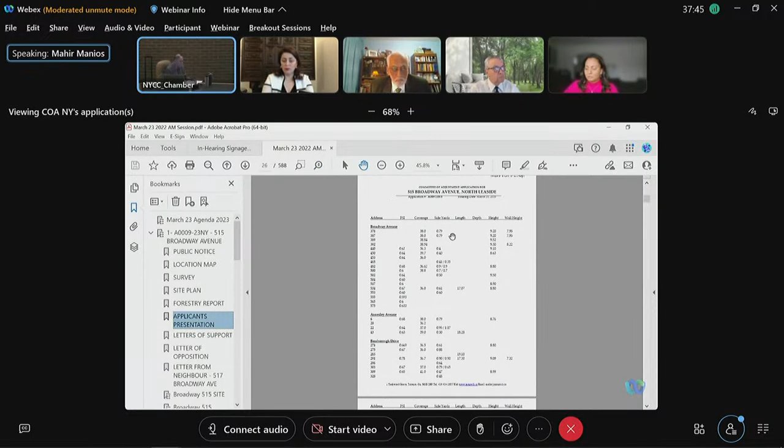Sure, Mr. Chair. If staff could be kind enough to put up the presentation material that we submitted, and scroll to the streetscape, I think it's the 5th page. That's the one, yes, that elevation, not the picture, the one above it please. The streetscape, yes, thank you. So the proposal is for a new 2-story dwelling to replace the existing 1-story.

We do have 3 variances under bylaw 569, and also 1277 that was just passed last December. Variances 1 and 2 pertain to the wall height and the roof height. We're proposing 8.89 versus 8.5, and 7.82 versus 7 meters.

As you can see from the streetscape, the elevation of the proposed house is a contemporary design with a very shallow pitched roof, which was done in order to reduce the massing and impact of the house on the streetscape. We've shown the adjoining neighbors just to give an idea of massing and how it compares to them in regards to height.

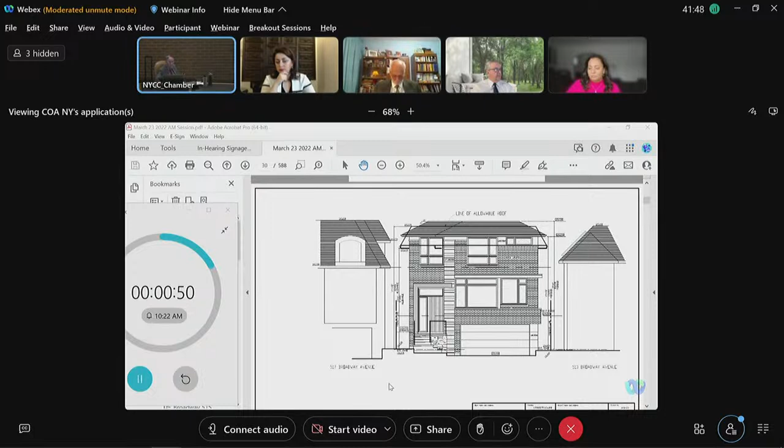As Mr. Chair noted, we do have 5 letters of support, including the east neighbor. We have been in communication with community planning, and we received an email from them on March 15 noting they had no concern. Hence, there was no staff report submitted as part of this application, and we have no objection to urban forestry condition number 3 if the committee sees fit to approve the application. I'm happy to answer any questions.

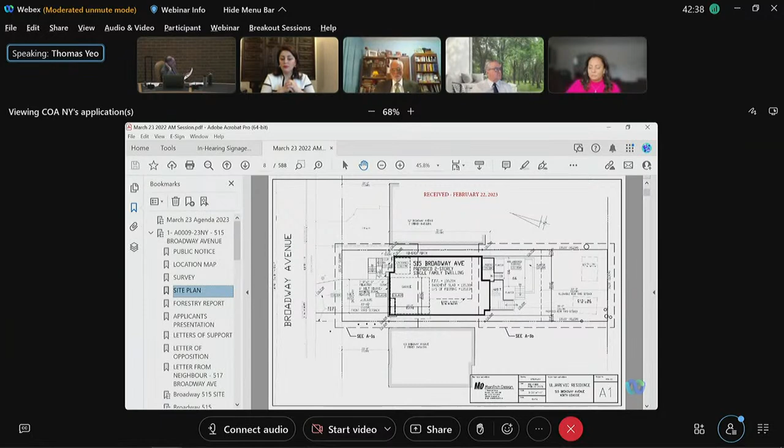Yes, I can speak to that. We're the east neighbor at 517 Broadway. I think we had highlighted in our note that we were still in discussions with... Who's speaking? Oh, sorry, this is Thomas Yeo. Could you please state your name and address for the record? Yes, it's Thomas Yeo, and my wife Sandra Haynes and I live at 517 Broadway Avenue, which is the east neighbor.

Tell us what your concern is about this application. We submitted a written submission last week. We did note that we may have some concern with the back terrace, but we've agreed with the neighbors. They've agreed to plant cedars that will address our privacy concerns. So on that basis, we've got no further objection or concern with the plan.

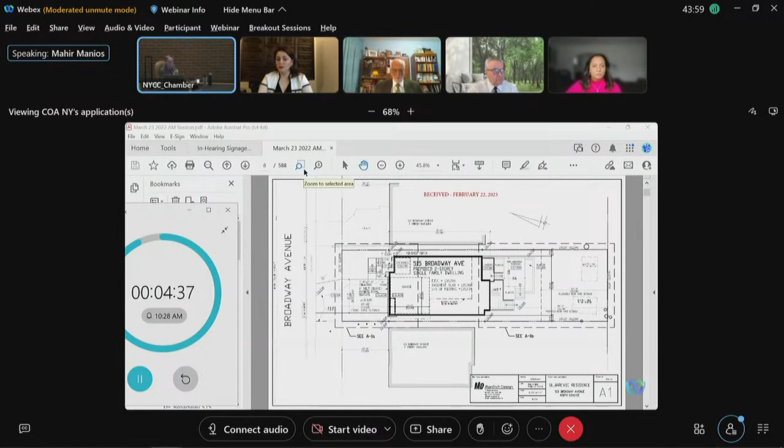Yes, my client has discussed with the east neighbor, Mr. Yeo, regarding the cedars to create a landscape buffer screening between the two houses for the benefit of both my client and Mr. Yeo, and they have email correspondence to that effect. There was also an issue about the location of windows on the side of the house. We showed their windows imposed on ours to show there's no overlap, plus all windows on the side of the house are in bathrooms and a staircase. We also agreed to having translucent glass there as well, so there would be no overlook or privacy issues.

Very good, and happy to answer any questions from the committee. Okay, I saw his letter, he's supporting it with the three conditions, so you addressed it. Any questions, members? No. If not, can I have a motion then, please?

Ms. Atarodi? Yes, through you, Mr. Chair, I would like to put forward a motion to approve this application subject to the urban forestry condition. Thank you. Second? Mr. Hunt, seconding. All in favor? Unanimous. Okay, thank you. Your application is unanimously approved, subject to forestry condition. Thank you, Mr. Chair.

Next is application number 2, 74 Glenrush Boulevard. And here we have Richard Idels. Are you there? I am, Mr. Chairman. Okay, please state your name and address so it can be recorded on the system. Richard Idels, 80 North Meadow Crescent, Thornhill, Ontario.

So here we have an addition and parking modifications, 6 variances. Transportation has no objection, just conditions. Forestry has condition 1, and there are 20 letters of support. Could you please make a small presentation and cover the variance for the 40% lot coverage?

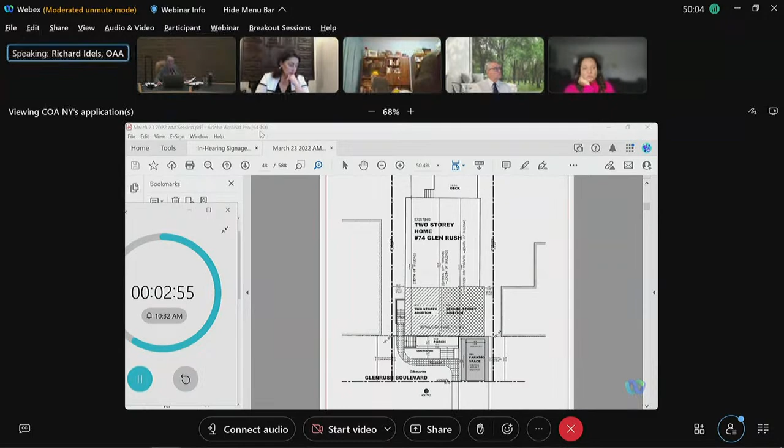Just to go through the variances quickly, then I want to speak about the condition from the department. One moment. Most of them we believe are minor. The first variance is the height of the front porch, an existing condition since we're just adding to an existing house. Number two is also elevation, minimum, and also existing. Number three is the percentage of coverage, which we just spoke about.

Number four is the length, also an outcome of the need for a bedroom for this family member. She's a young woman, probably in her 20s or 30s by now. There are 7 examples of similar building lengths allowed within the area. Number five is the setback, which we believe is minor, for the same reason, and also the parking space.

What I'd like to explain is that we understand it was sort of last minute. Last week the planning department sent their comments to the owner. The comment is basically that right now they have a double car garage. In order to fit what we needed on the ground floor, we had to eliminate one of the garages, so the driveway became much narrower. That's fine on our property, but the city property does have a wider driveway because the existing double garage allows for it.

They sent us Marilyn Lewis from the traffic department. We wanted to discuss it with her because we have an accessibility problem. When this little girl comes in a special truck, she needs room to get out of the truck, and we've limited the width of the driveway. We would like to speak with the traffic department to see if they would be kind enough to leave the existing driveway and the curb cut, which is wider, in order to accommodate the needs of the family.

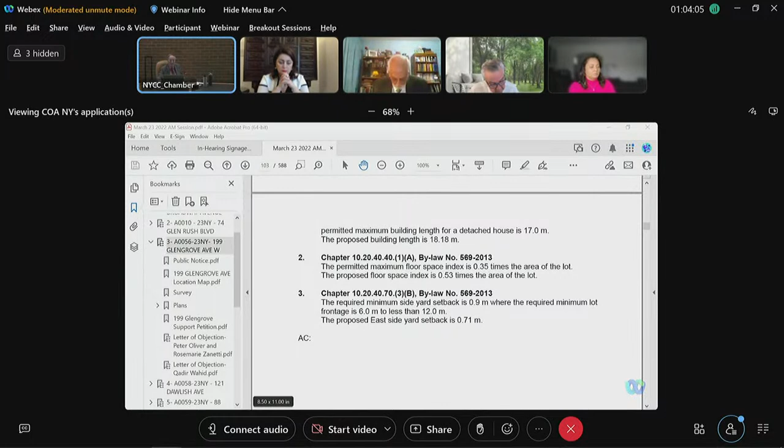So I will point out that with respect to the side yard setback requirements, there is no requirement for a specific side yard, whether that be north, east, west, or south. The side yard setback is always only relevant to a side yard setback or both side yard setbacks. The fact that in this case it applies only to one side does not, in my opinion, affect the notice. No, this is very clear to us. If it's published as east, we cannot change it to the west, regardless of what you explain about the west side conditions. If you want to go ahead with east, we'll proceed. If you want to change it, we cannot change it. So, do you want to defer it or go ahead as east? We will not change it to the west.

Given that the variance is to the east side yard setback, if we were to achieve that variance or gain approval for it, that would not get approval for the plans as proposed. If that is the case, then a deferral would be necessary. We can't proceed with the change to the west.

Members, just a second, there is one more person here. Stanley Janicek, are you there? Stanley Janicek? Hello, Mr. Stanley Janicek, are you there? Can you please speak up? He's online, yeah? Okay, one more time. Stanley Janicek, are you there? That's the only one, eh?

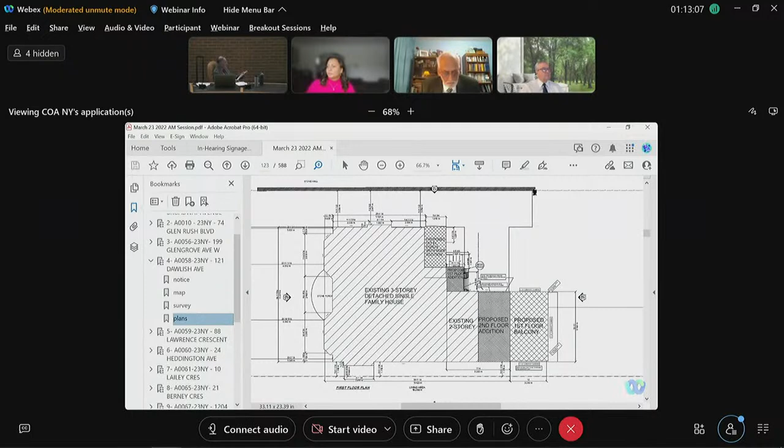Well, they already have a balcony that's that size, so they basically just want to move it forward, and there haven't been any problems with the balcony that way. The neighbors haven't objected, and it's also not that high up really. It's higher than the 4 feet, so we need the area, but it's not way up in the air on the second floor or something. So basically they already have a balcony that size, but because of the addition, it's going where the balcony is, so they just want to maintain that space.

Okay. Thank you. Can I have a motion then, please?

Ms. Tarodi? Yes, through you, Mr. Chair, this is a very straightforward application. Therefore, I would like to put forward a motion to approve this application with no condition.

Thank you. Second? Yeah, both of you at the same time. Can I have a second, one at a time? Miss Manning, seconding. All in favor? Unanimous. Okay, sir, your application is approved and there are no conditions.

Okay, thank you very much. Have a good day. You too. Thank you.

Application number 5, which is 88 Lawrence Crescent. Application number 5, and here we have Mehdi Ajvand. Are you there?

Hi, my name is Noushin Mozaffari from Hyphen Studio, representing the case. Okay, you're the agent, right? Yes, I'm the agent on behalf of the owner of 88 Lawrence Crescent.

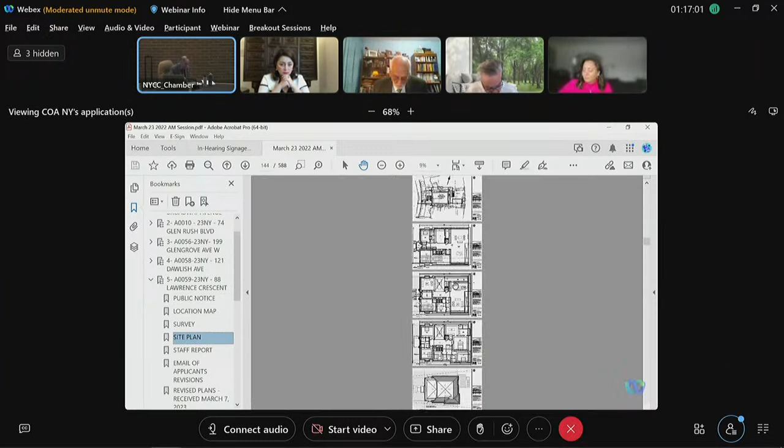Okay, the application is very straightforward. We are asking for basically 7 variances. To give a brief explanation: variance number 1 is for the height of the porch and first floor to be slightly more than what the bylaw allows. Variance number 2 is regarding the deck's projection, because the natural grade has a very deep slope toward the backyard, so the height of the deck is higher than 1.25 meters from the ground, and the deck projection is a variance.

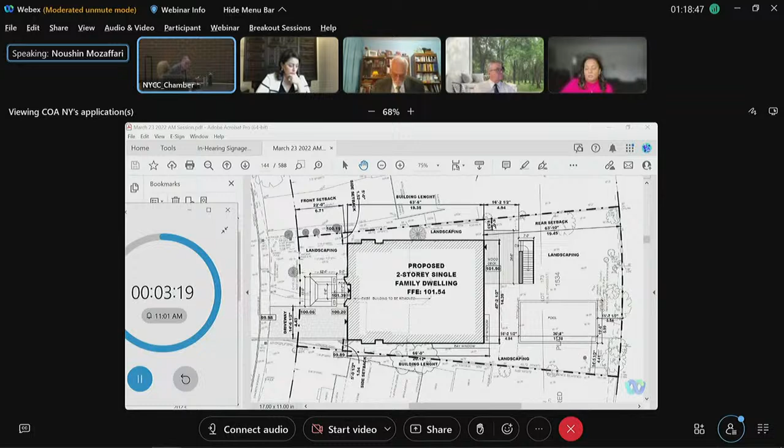Variance number 3 is for the canopy that is covering the first 2 steps in addition to the front porch. Variance numbers 6 and 7 are for the length and depth, which are reduced to 19 and 19.5 meters, back and forth with the planning. Variance number 8 is for the FSI, which is very similar to other approved cases in the neighborhood, and planning is supporting that proposal. I should also mention that the actual FSI is 55%, but 2 extra percentage points are added because of the excessive area of the garage. That's all, I would be happy to answer any questions.

Thank you. Okay, now we'll be back to you because we have one more speaker here. John McEwen, are you there? Mr. Chair, he is not present. Staff have tried to reach out. No answer. Okay, thank you.

All right, members, any question for this speaker? Mr. Khan, please go ahead. Thank you, Mr. Chair. My only question is, although it has been modified by the applicant, my question is about variance number 8, FSI, which is 0.57, which is quite high, something like 38%. Now, this is much more than one can accept. So I would say that if there is an explanation, although the lot is big and staff has no objection, how can I accept this 38% more than allowable?

The question is, could you please explain why you're asking for 57 instead of 35?

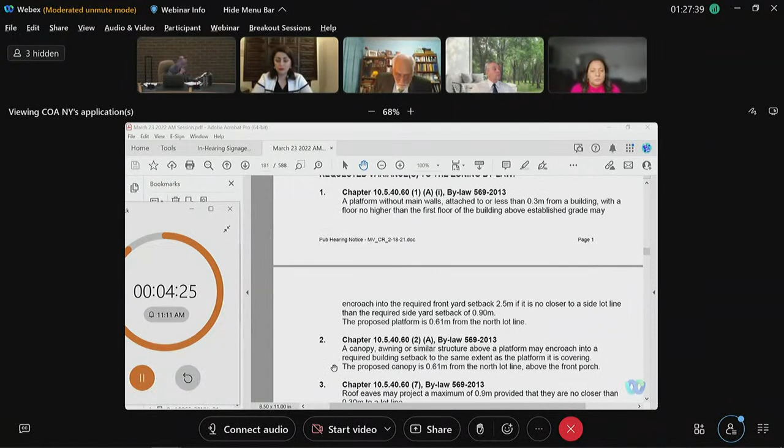Variance number 3 has to do with the roof eaves. We're just coming 6 inches closer to the north side property line than what the bylaw permits. So that one's pretty straightforward.

Variance number 4 has to do with the wall height. The general wall height for the entire building is about 1.5 feet taller than what is permitted, that's 8.04. But there's a small dormer on the south side, which is just a very isolated case, and we need a variance for 8.81 meters in order to get that window on that side.

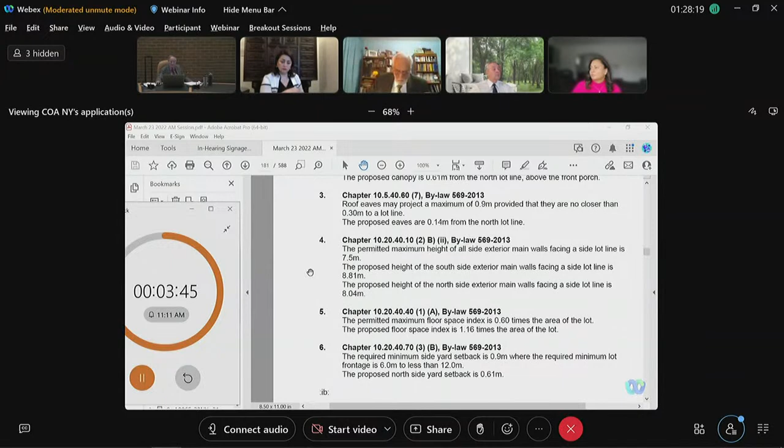I think the big one here is variance number 5, having to do with the FSI, as far as the variances are concerned, the big variance.

This went to committee of adjustment a couple years ago, a very, very similar dwelling with another designer, and 81% FSI was approved back then. The house design today before the committee, as I speak, is also 81%. Because of the bylaw change that took place approximately 4 months ago, the basement is now being included in the FSI calculation. So that's why the variance is for 116% or 1.16, but in reality, the house is 81% or 0.81. Again, that was already approved for a new dwelling on this property a couple years ago.

That's sort of the best way to explain it. So if this went to committee 4 months ago, I'd be asking for 81%. But because of this bylaw change and the basement being included, now today I'm asking for 116% for the same. That's what I'm asking for. Thank you.

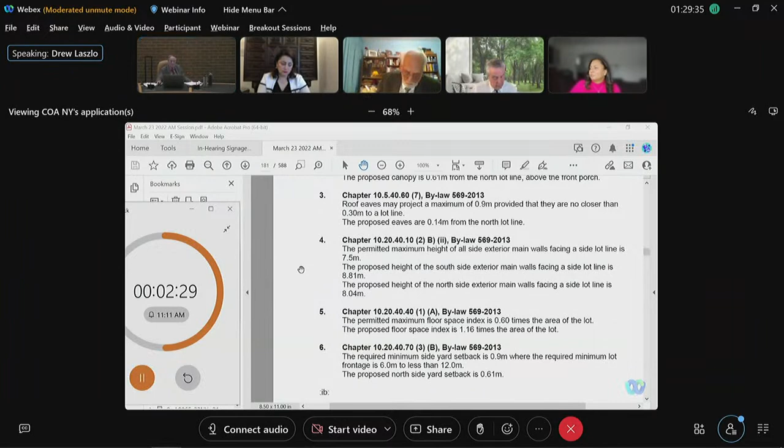Considering the change that now requires 1.16, do you know of any houses in the area that had the same amount? 116%, that I'm unaware of.

Again, I look at this, I know the number is 116, but I'm really looking at this as an 81% house. And that has been, again, this property itself was approved for that a couple of years ago. Number 57, number 97, number 136 Heddington, they've all been granted 81%. It's quite common for the neighborhood.

So based on 81, there are other houses in the area, correct? We used to get a list of all the houses in the area with the amount, but now we don't get it, so we rely on you. So you say based on 81, there are lots of houses in the area, is that correct? Correct. And again, the need for the 116%, that is only a few months old, so there's not a lot on record. Okay, thank you.

All right, so we'll be back to you, and then members may have some questions after we hear this. Dimitri Zervas, are you there? Dimitra Zervas? Yes. Okay, could you please state your name and address for us? Dimitra Zervas, I'm at 20 Heddington.

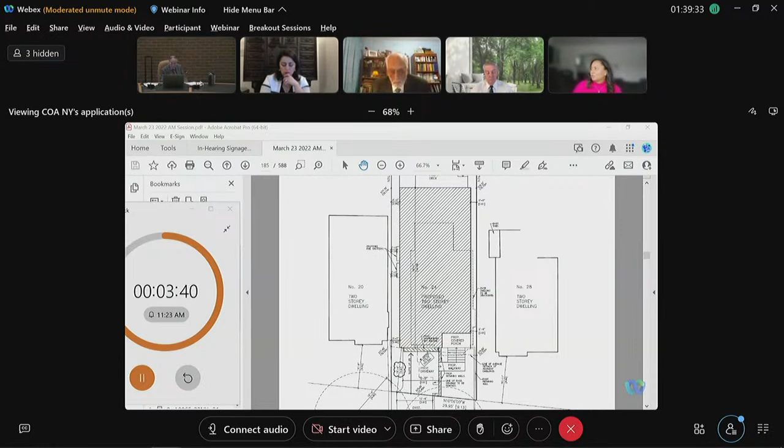As far as landscaping is concerned, we conform to front and rear yard landscaping and hardscaping requirements. Overall, regarding wall height, the 8.81 meters—it's up to staff if they want to put up a south elevation, if they could briefly show that so committee members can see why we need that variance on the south side. It's a very isolated kind of case as far as I see it. If you could scroll down a bit more to the south elevation, please.

That's the rear, and that's the north and the south. So if the committee members look at that window, please, on the second floor, we have to bump up that roof over it just so we can get the eaves trough. We're doing all we can to keep the eaves trough as low as we can. So it's very isolated, that 8.81 meters, as you can see.

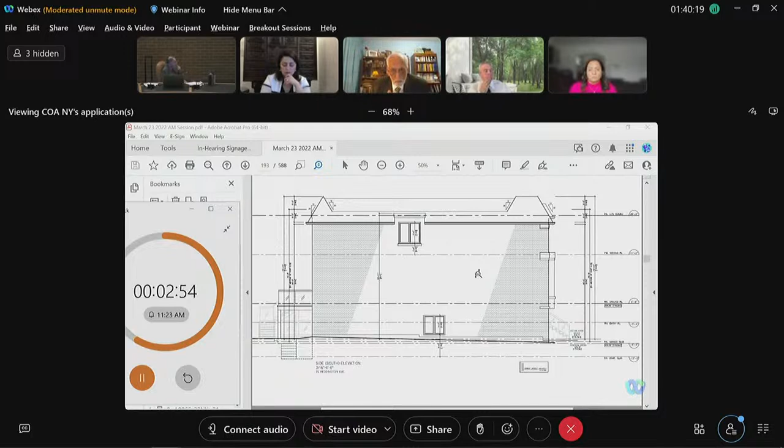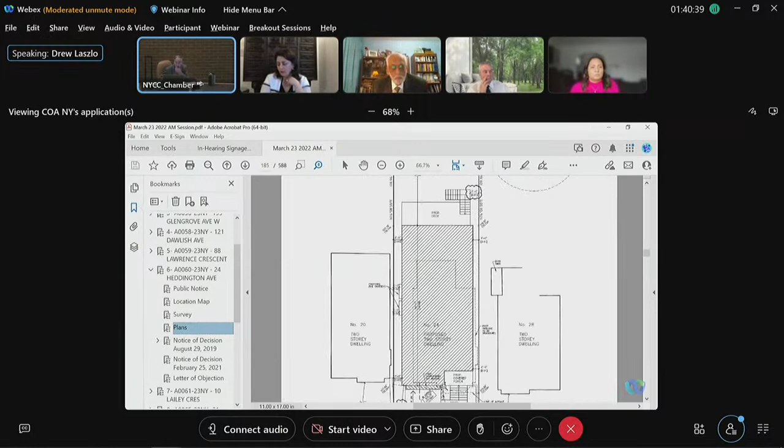I believe that, oh, and we do have fire shutters, and they're shown on the drawing. So as far as the neighbor having issues with fire jumping from one dwelling to the next, we are required to have a fire shutter on there. It's actually shown on the site plan. When we apply for building permit, it'll be very clearly shown on the drawings that a fire shutter is required, so fire cannot jump from one building to the next.

Okay, thank you. If the committee has any further questions, we'll see what the members say. Members, any question? Mr. Khan, please go ahead. Thank you, Mr. Chair, through you, sir.

My concern is, first of all, I want to bring it that on February 25th, 2021, 10 variances were approved by North York panel, of which I wasn't a member at the time. But today I have in front of me 6 variances. These 6 variances are more or less the same as they were presented on February 25th, except variance number 5, FSI is increased to 1.16, and neighbors are raising objection about it. I'm not happy about it because it is 48% higher than the maximum allowable.

So I have a motion to make, and that is my question — why it is this high, he has already explained, and this is way too high that I will accept. You made a comment that this is very high, do you have a question to the gentleman? No, sir, that is my comment, Mr. Chair, not the question. It's not a question, it's a comment.

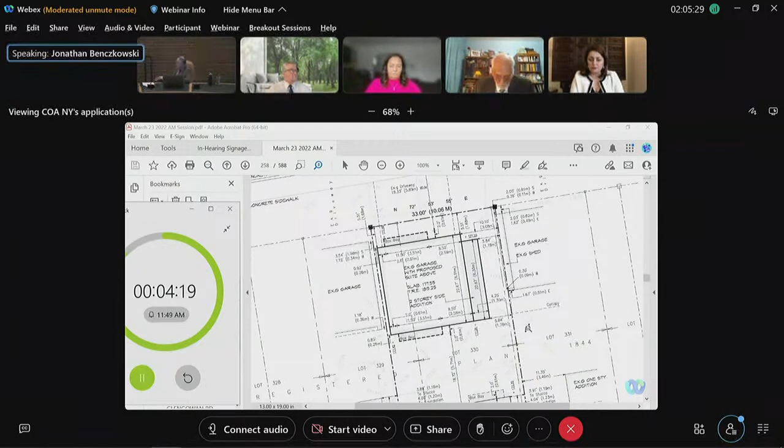So the proposal will maintain the garage at grade, and as mentioned, the setbacks to both the west, which is the left, and Castlefield, which is the top. The only grade addition is, as we see, a hatched portion on the right side of the screen, which is for a stairway to access the second floor suite.

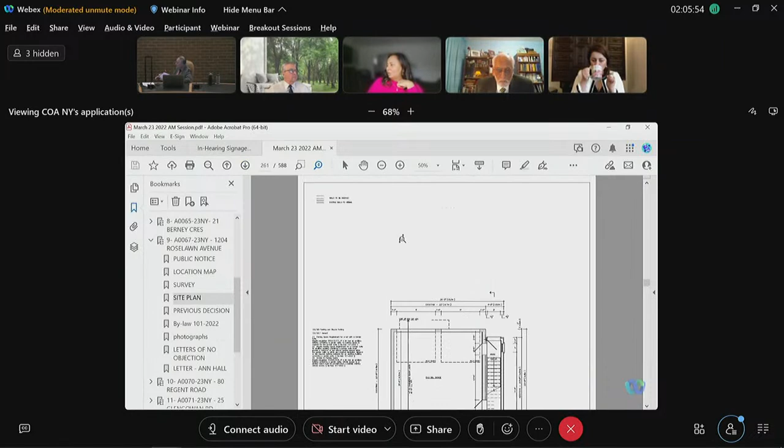And if we could go down to the next page, please. As mentioned, the entire second floor — sorry, one more down, please, just till we get to the second floor portion. Sorry, one more, and then one more. Yeah, one more, please. That's it. The entire second floor is proposed, again, to be built in line with that west setback, as well as to both the south and the north.

Except for these small box bays that we see on the left portion of the screen. The existing location of the garage, without these 2 small box bays, would still require relief for the separation distance between the main dwelling and that existing garage.

In terms of one of the objectors speaking to a balcony, if we see on the left portion, that is actually just a small Juliet balcony. There is no foot access that would be permitted there. So the entirety of the second floor walls at both the east and the west is to be built in line with the first floor below.

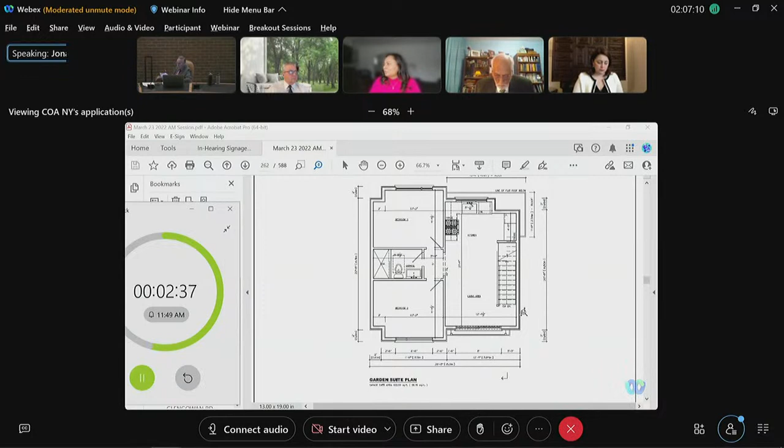Those 2 box bays are the only addition that are outside of what would be at grade. The garage itself is causing the setback variance to the north along Castlefield, as well as the separation distance between the main wall of the house and the proposed second floor. In terms of the angular planes to the side, offering that 45 degrees, this simply would not be a usable garden suite if those were to be complied with. The last point I'd like to touch on is the proposed request for that height increase at 6 meters.

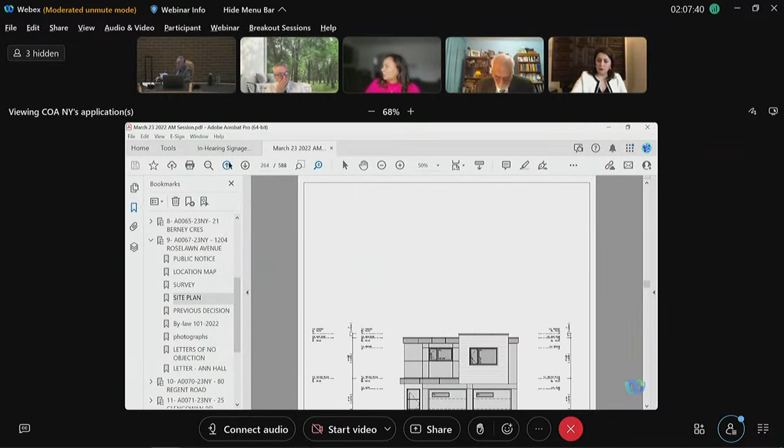If we were to go to the floor plans, we would see that the existing height is being maintained on the first floor, and the second floor floor-to-ceiling is a very modest proposal of 8 feet floor to ceiling. So that increase of height to 6 meters is not being caused by, for example, a 10-foot floor to ceiling on the second floor. That second floor floor-to-ceiling is proposed at 8 feet, which is very modest and really would be in keeping with other garden suites that have been approved. And that's my presentation. I'd be happy to answer any questions.

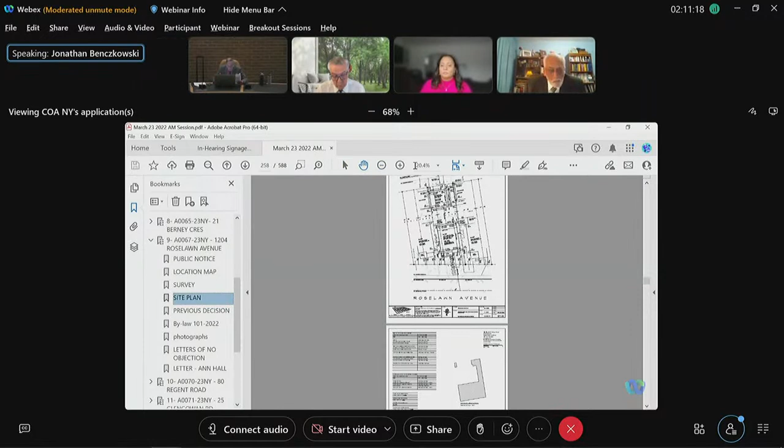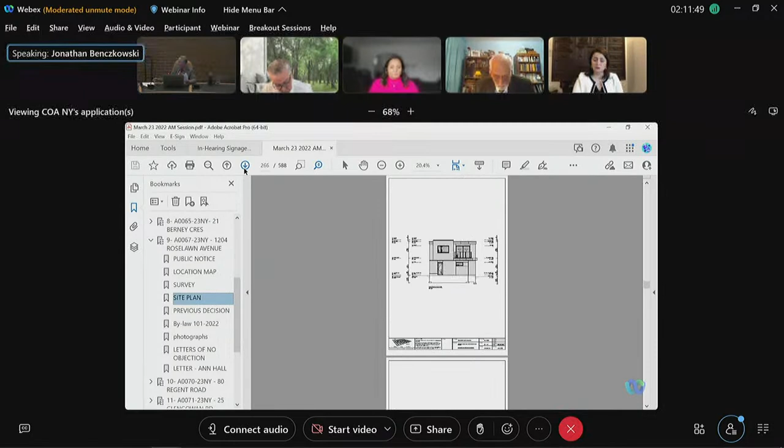Yes, if we could go to the last page of the uploaded plans, there are a couple of color perspective renderings that I think would be very helpful when we speak to the issue of overlook and privacy. Specifically the bottom one, please. So the individual who was objecting is located to the west. So the portion of overlook really is just for that one window of that box bay. In terms of that Juliet balcony, that is set further behind that box bay. It is located away from the individual's property. In addition, that box bay there is actually for a bedroom, not for a living room, which generally would lead to less overlook, as one often doesn't sit and live in their bedroom, rather sleep as well as leave.

In terms of the issues that dealt with setbacks, again, this is the maintaining of an existing garage. The 6 meter is very modest in height, in my opinion, given, again, the 8-foot second floor to ceiling. Again, if this were not to be approved, essentially this would not be permitted to have a garden suite on it, just based upon the location of the existing house, as well as the existing garage. And again, it is important to note that this is a through and through lot with access to parking coming from Castlefield to the north. I'd be happy to answer any questions that you might have.

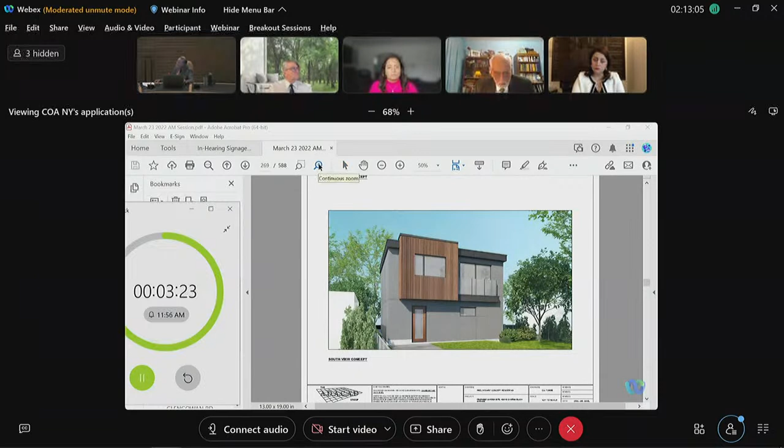Hey, Antonio, do you want to speak now? Yes, I'm Antonio Capella.

I live at 1208 Roselawn Avenue, and I'm more than supportive of what the gentleman is doing with the house at 1204 Roselawn. It really needs to be renovated, and I think it would be good for the street anyways, to have everything up to date. I'm totally supportive, and so is my mom. My mom supports his actions too.

Thank you, that's nice to hear. Thanks, Antonio. Mr. Capella, that we didn't have before, now he's supporting.

Okay, members, any question? Mr. Khan? Thank you, Mr. Chair. I would like clarification of variance number 1 from the applicant. He's saying the proposal is 1.07. What is this distance, or what is proposed? What is he suggesting?

Mr. Brankowski? Sorry, I'm not quite sure I understand the question. Sir, my question is your distance 1.07 - what is this distance to, and from what item? Oh sorry, now I see. Through you, Mr. Chair, Mr. Khan, that's to the north portion, which is Castlefield, which is triggered by the through and through lot.

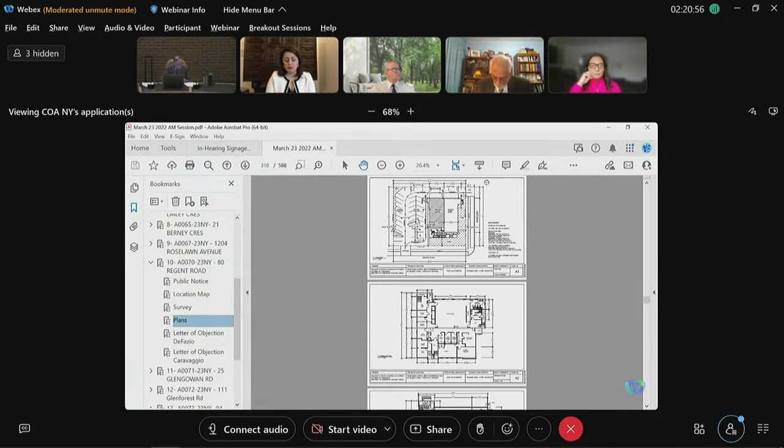Our application is a proposal to create a pastor's residence for the church. It will be a 2-story residential building attached to an existing church.

When we applied for the zoning review, we went first for the first review, and then there was a second review to eliminate some of the variances we encountered. Right now, we only have 3 remaining variances, which we think are very minor.

The first is the required rear yard setback for the building. The fact is that we are just following the existing rear setback of the existing church, and there is enough space there for even a driveway, because that is our existing driveway now.

The second is the parking space that they said is located in the front yard. The parking spaces remaining there are existing parking spaces for 63 years. We actually moved the 2 PWD parking back so that it will clear the front of the building.

The third is the green space required, 3 meters from the lot abutting the development. As all the parking is existing, we can only do minor landscaping to the west of the project, but we cannot do anything about the rear because it is actually part of the parking and driveway.

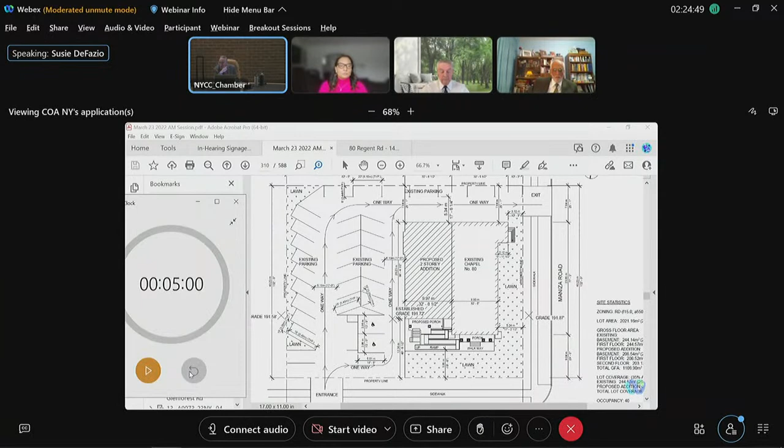Susie DeFazio, are you there? I'm a resident of the area, have been for over 50 years, and I oppose this because I back onto this property. Excuse me, before you go along, we need your name and address to be recorded on the system. Could you please state your name and address? Sure, it's Susie DeFazio, and I'm at 65 Catherine Road.

I back onto this property that's in question here, and I am opposing it for the various reasons that I also sent in the letter. My property backs onto the back part of this parking lot, and I'm concerned that with having a 2-story addition done, it's going to impede on my privacy in my backyard. I'm not going to be able to receive the sunlight that I receive today. And when looking out from my backyard, I'm going to be looking out to a bigger building instead of what's there now, which is beautiful to look out to the sky at night.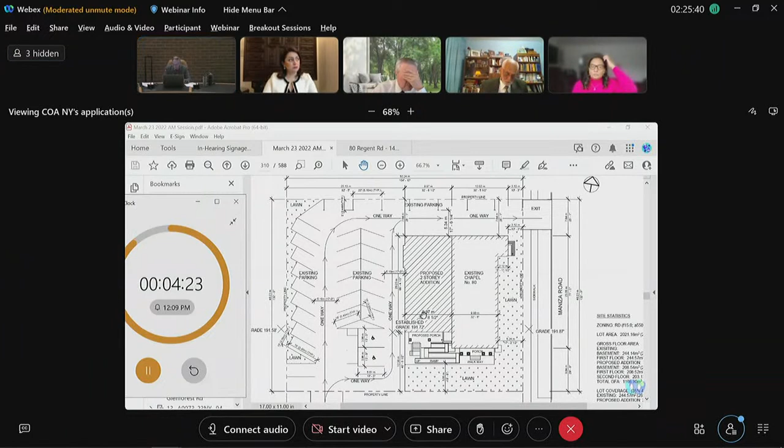I'm also concerned with the traffic flow in the area. There's been an increase in parking along our side streets. This isn't only one day a week, like some other parishes. They come constantly down the streets. They park right up to the corners of the road, making it very dangerous when we need to exit our road. They've parked the wrong way on the road. So I'm concerned with that and having additional flow through the area.

I also believe that this should have been a community consultation. This church has been here, like they said, for over 60 years, and I think it affects the community as a whole, not only the immediate people around the area.

Unfortunately, a lot of the people who live directly across or even to the side of it are seniors, older Italian seniors that probably didn't even know what this was all about when they received this paperwork. So having something more of a community consultation, I think, would have been a better idea for this. So those are my concerns. Like I said, I do have some other ones.

I think the structure will be too intrusive to fit the character of our neighborhood. That's one of my additional ones.

Okay, thank you. Any question for the speaker? All right, Ms. Atarodi, you have a question? Yes, to you, Mr. Chair.

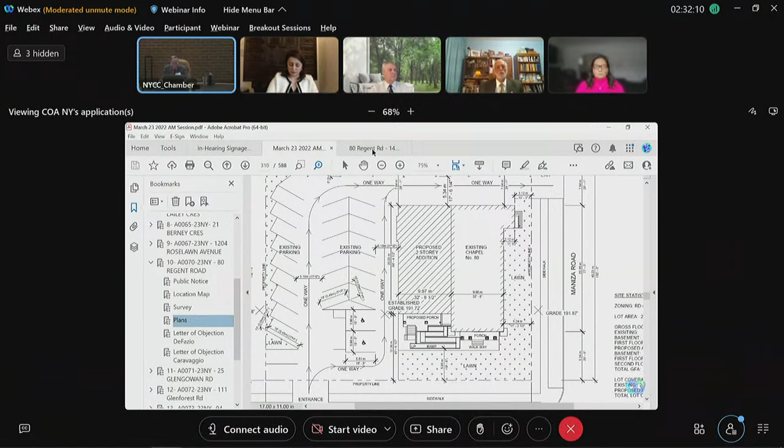Okay, Mr. Tony Valentini, could you please respond to the concern, Mr. Chair? Yes. And there is—just before you go, we have another report from transportation with some conditions, I don't know if you saw it. Yeah, I will address it. Okay, so the members will have to—I will address that to the Chair. Okay, yes, I will address that also.

Okay, so please, you have 3 variances, tell us your response to the concerns you heard. Yeah, I was also concerned the first time I read the letter from the neighbor. I was not aware where they are located, so I took a site visit.

I'm sure that some members of the committee have site visited the area, because that's the normal procedure, that some members should visit the location of the project. If you have visited it and saw the location of the concerned houses, they are way back at the west side, the northwest side of the parking lot. It will not involve any building on that side. As a matter of fact, the proposed residence will be attached to the church, and it is too far from that to create any shadow effect.

I'm sure that some members of the committee who have visited it will also see that there is no way the shadow of a two-story residential unit will be interfering with the privacy, the shadow effect, or the loss of light by the neighbors. There are plenty of sunlight they will have because it is an open parking space. That's all for that concern.

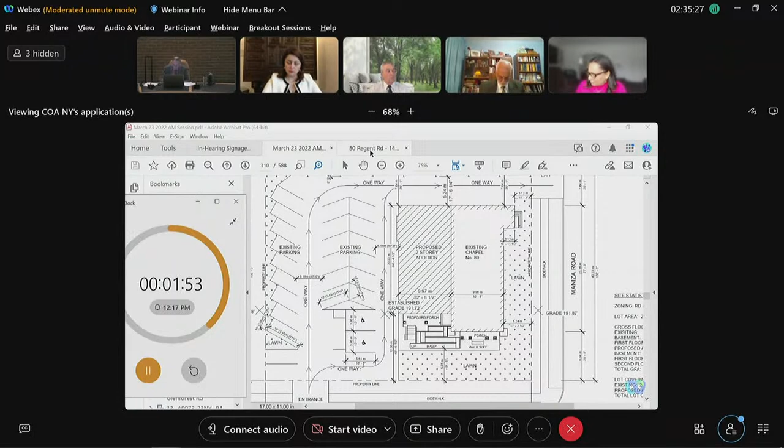All the parking spaces there have been there for 63 years. We are not touching any of the parking spots. So far it is working. Whether the size is different from what the new bylaw is, when it was built it is a legally existing parking space. That's all I would like to address to this committee, and I hope we will get a positive response. Okay, thank you.

Very good. So like our members say, we concentrate on the variances. People talk all the time about light, sunlight, and all that, but we concentrate on three variances, and that's what we're concerned about. If you didn't have these three variances, you wouldn't be here, you would be building what you have to build. So let's concentrate on these three variances, plus the transportation we just got. You said there is no reason when we have it, we have to put it as a condition. So whatever you decide with them, it's fine with us.

So members, we have a transportation letter, and I'd like to first ask, any question to this speaker before we move to motion? Mr. Hunt, do you have a question?

Oh, hold a second. Yes, thank you, Mr. Chair. I'd like to— No, before you move to Ms. Manning, she had her hand up first. Ms. Manning, did you have a question? I just want to be able to take a look at the transportation report because we didn't receive it. Can they leave it up on the screen for a minute or two? Yes, please. Could you put that on the screen?

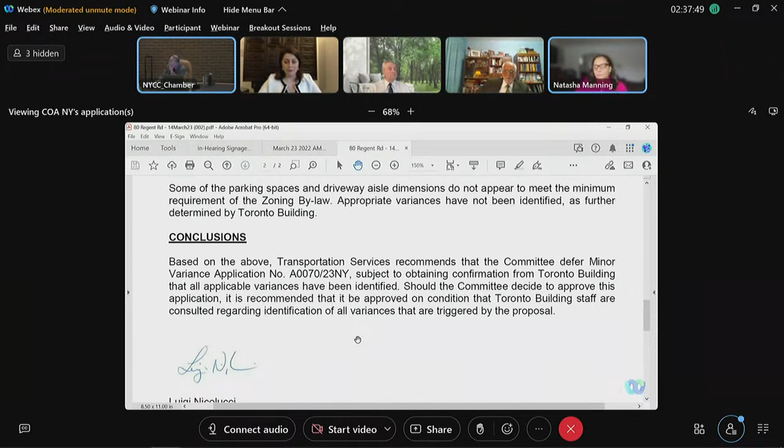Can you read it from there? I'm having a hard time reading it from there. Okay, can you see it, Ms. Manning? Yes, thank you. Okay, yeah, the condition is there.

And I think Mr. Hunt has his hand up first. Mr. Hunt, is that a question? Yes, I have a couple of clarifications I'd like from the applicant's agent. Firstly, if you look, I believe you said that this was going to be an addition to provide a residence for the pastor, is that correct? Mr. Valentini, do you hear the question? Yes, that's correct. Okay, so it's safe to assume that this addition is not going to lead to a larger congregation.

No, no. All right, my second question is that all of the parking shown on your location plan is not going to be disrupted by the addition. No. So you will be able to park just as many cars on your site as you can pre-construction. Yes, we still have the 31 parking spots there. Okay, great, thank you. Okay, Ms. Atarodi, do you have a question?

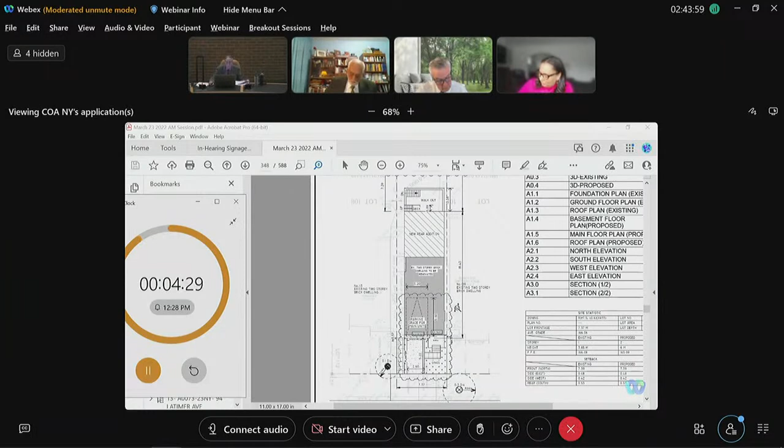Yeah, absolutely. Could you pull out the drawing first and move to page A0.1? Yeah, that's the page. Please allow me to briefly go through the variances first. Variance number 3 and 4 are related to the setback of the garden suite. Variance 6 and 7 are related to the height. Variance number 5 is the setback from the main building. Variance number 8 is lot coverage, and variance number 2 is about the soft landscaping coverage.

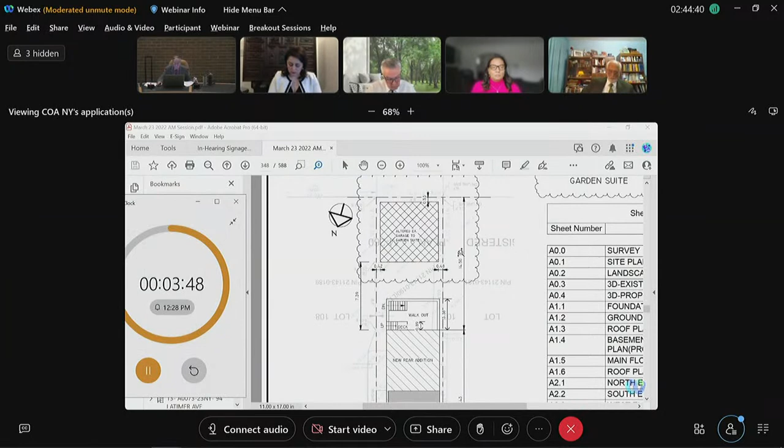Let's go back to the proposal. Previously the front addition was approved, and now the owner is looking for an opportunity to alter her rear garage into a garden suite. This is basically an existing garage at the rear yard, and now the garage function has moved to the main building. In favor of the garden suite provision introduced last year, the owner came to me to try to alter this garage into the garden suite.

So based on the bylaw setback exception, the garden suite could be achieved by extending the existing wall to 4 meters and a gable roof up to 6 meters, along with a 45-degree angular plane on each side. However, during the zoning review, the rear garage doesn't match the city record for some historical issue, and therefore is deemed illegal existing, which triggered variance number 3, 4, 6, and 7.

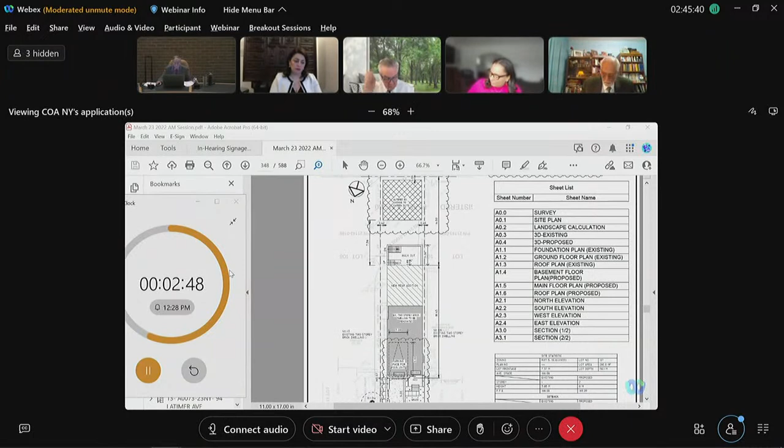According to the owner's research, this garage has existed for more than 20 years, as shown in the cover letter that I submitted. The neighbor across the street advised that this garage may have existed for more than 40 years, and the satellite map from Google Earth shows this garage dated back to 2005.

That's all, and I'm very happy to answer any question or concern. Okay, thank you, we'll be back to you. We'll see what the neighbors have to say.

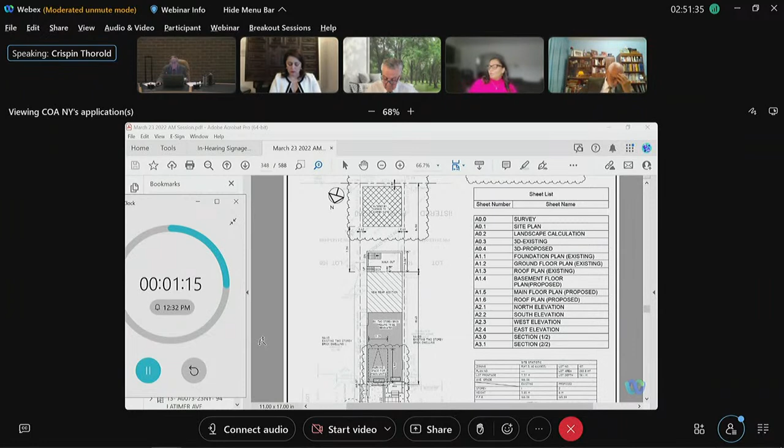Well, I see the objection here is covering a lot of terrain, but we have here as does the house. We have here a number of variances, and I'm trying to pin it down to which variance you're opposing. Because if they didn't have these variances, they could go and build it without coming here. So I'm looking into variance. But not in the existing structure, in my understanding, sir. Yeah, so I'm trying to...

We object to the variances that mean the property will be right on the property line on the east, west, and south sides. So that's 3 variances there. We also object to the variance on the height of the property, and we object to the variance on the softscaping as well, the area that the footprint of this will take. Okay, got it, haven't got the numbers to hand, I'm afraid, but yeah. Fair enough, okay, any question for the speaker?

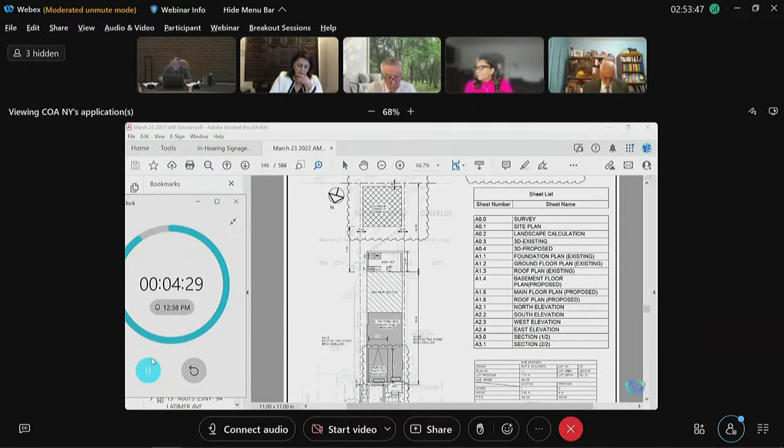Well, generally, as Crispin mentioned, it is the numerous variances that are requested, where they are in excess of or too large for the size of the property, or the encroachment onto the existing lot lines. Where they're not encroaching, the building is designed to go to the absolute maximum as required by code. At the least, there should be some reductions in the height and second floor space to account for the oversize of the ground floor. Otherwise, if the applicant wants to build something in the backyard, fine, build it, but build it within the permitted lot area or building area within the lot. Trying to have the cake and eat it too, basically, seems to be what's excessive.

Also, while this is a second and separate application, there were several applications to enlarge the main house, which is currently under construction to a major extent. The drawings submitted at that time showed a garden shed in the back, actually taking down the existing garage and reducing the size of the building by approximately half to basically a garden shed. Now, all of a sudden, the existing garage is remaining and gets a full second floor added to it. I don't think there are any drawings for it, but the interior clear height of the ground floor is shown as 9'6", and the maximum height of the second floor in the middle part is shown as 11 feet. It seems excessive for a garden suite.

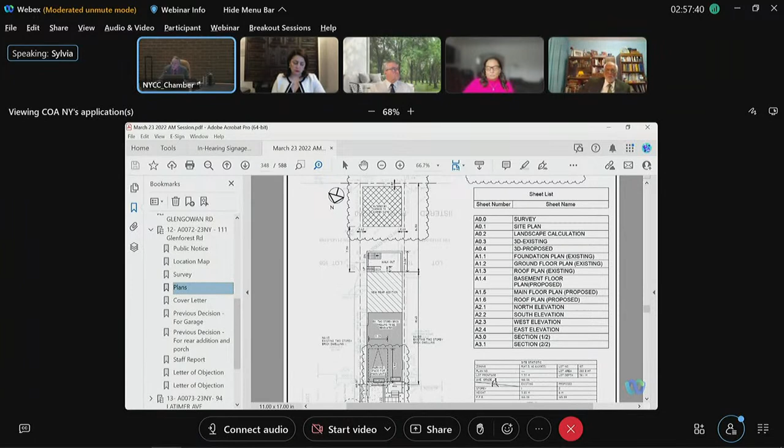My name is Rui Gong and Sylvia Hong, and we live at 109 Glenforest Road, which is immediately adjacent to 111. Okay, now you heard the other speakers, do you have anything different?

Yeah, I want to add something. We submitted some slides, I don't know whether the committee can show them on the screen. Just the photos, please.

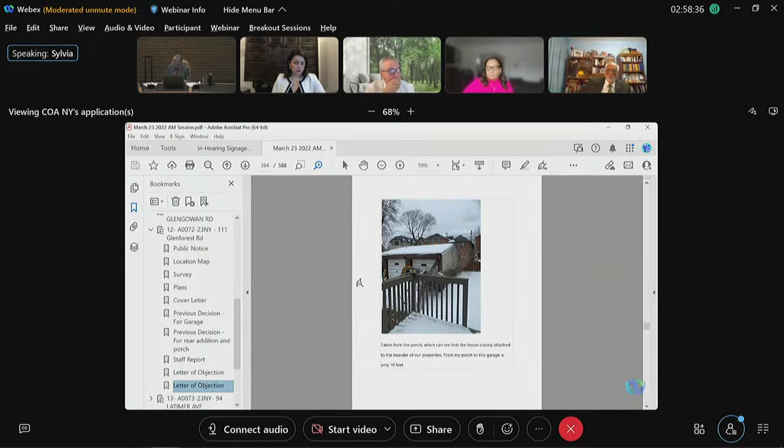You can see from the photos, the current garage is very close to our side lot line, and there's no blending fence. We're afraid that if a 6-meter high building is allowed, it will cast a shadow over most of our patio and significantly reduce the sunlight entering our house. Also, the other concern is converting this currently non-residential garage into a residential garden suite, which means someone will live very closely, extremely closely, to our house, with their window almost directly facing ours, and we have big windows.

So we are very concerned about our privacy and also some light pollution at night. And we also echo what our neighbors just said. We just think this is not normal under common sense, and this is not minor variations.

Another point is the owner, the applicants, have listed 10 variations in this application from their site plan. And if we consider their proposed walkout, actually only very little land is left for gardening. We also pointed out that this applicant already made an application less than a year ago for their main house. So these two applications considered together, we don't believe the overall project can be considered minor.

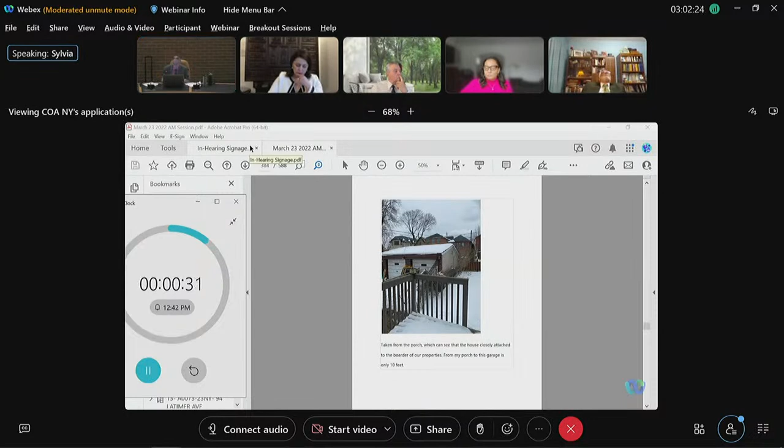Imagine who would want to live in a house with somebody just living facing your window just 4 meters away. I believe other families in our community feel the same way. If such a thing happens, it might lead to a ripple effect, and more residents would be forced to build their own garden suite in response, because this is probably the only way to make up for the loss we have. Ultimately, I'm afraid it destroys the beauty of this community. So, in light of this concern, we don't believe this project is a minor variation. Thank you.

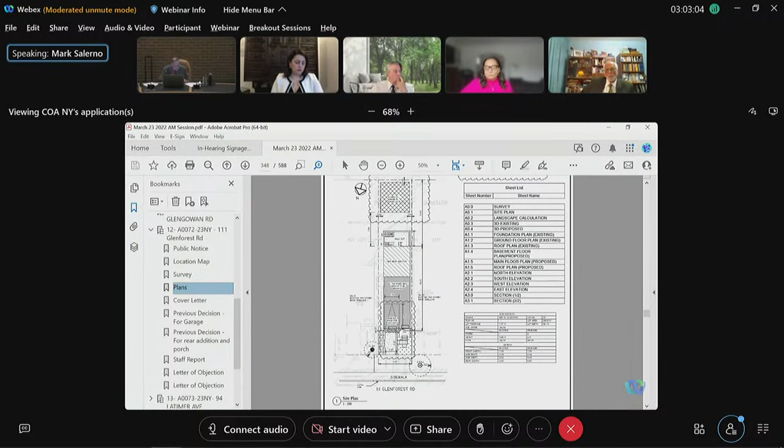I am. Can you please state your name and address? I'm Mark Salerno, 118 Glenforest Road. I'm across the street from the property. My objection is similar to the others, so I'll make it short.

My objections are to all 10 variances due to the size of the garden suite, the height, the proximity to the neighbors, the lack of green space and soft space it creates on that property. The overall area it occupies, the height being 6 meters, makes it the height of a typical 2-story home.

I do not object to a garden suite. I believe if the owner is looking for a garden suite, it would make sense to readjust this request to better fit the size and dimensions of that property. I'm worried that the lack of soft space may have an impact on stormwater management and flooding.

My only other comment not made by the others is that garage provided for parking for that property. The removal of that garage on our street, which is already a very busy parking street and only has parking on the north side, could actually intrude on the parking and interfere with people's ability to park on Glenforest itself. That's it.

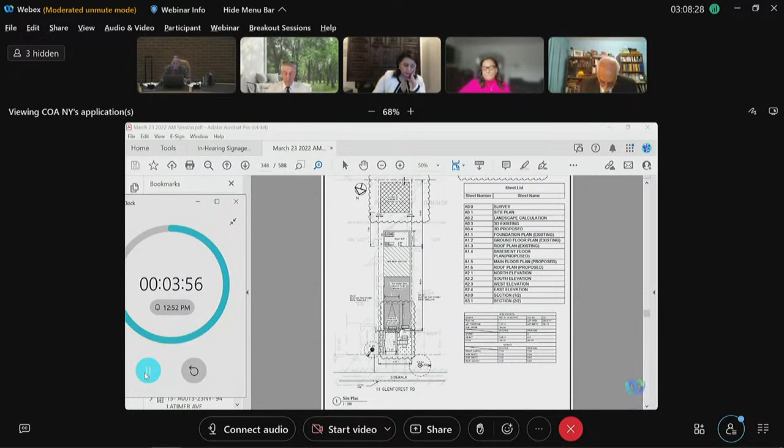I hope it's different from these ones. And if you agree, please say so. I share the concerns of my neighbors. I'll keep it simple. I object to variance number 1, and I object to the variance that talks about the height of the garden suite. I think it's worth repeating that the total number, nature, and extent of variances that the applicants have requested will really result in 2 dwellings that, when taken together, are inappropriate for a lot of this size. The garden suite is also set to replace an existing illegally constructed garage at the back of the house, and I find that to use a prior illegal act to justify this sort of extensive variances defies logic. So I strongly oppose granting these variances.

Thank you. Very good. That's a very good comment. What you're saying is the variances may be small each one, but the whole thing makes it big stuff. Okay, any question for this speaker? All right, so now we'll call back Mr. OU. Are you there? Yeah, I'm still there. Okay, thank you, Mr. Chair. So can you please address the concerns? You heard how much opposition there is. Yeah, I see. Okay, tell us what you want to do about this.

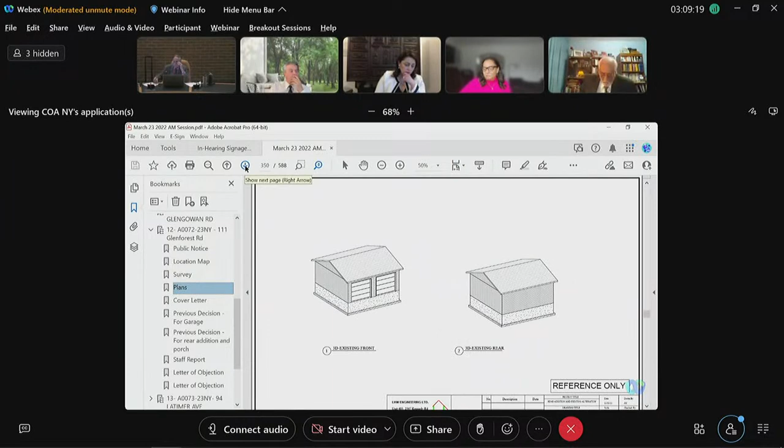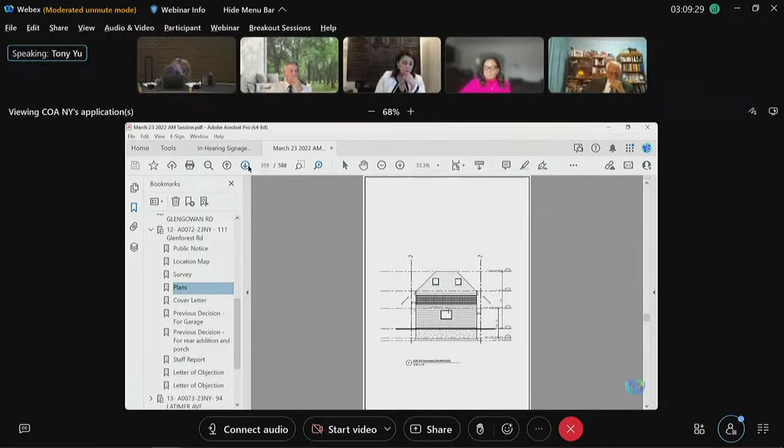Well, if you look at page 2.1, that's the front elevation of this garden suite. The main concern is raised by the two front windows at the second floor and a window on the dormer, which may risk overlooking their privacy. But the zoning allowed the 45-degree angular plane to mitigate the impact of privacy overlook and the shadowing problem. First, to address the privacy issue, the owner is willing to rebuild the 3.5 meter high fence on three sides to cover the vision from the two windows of the garden suite at the second floor. And if the window at the dormer really bothers the neighbor, this window could be altered to glass block in order to ensure sunlight and privacy to the neighbor.

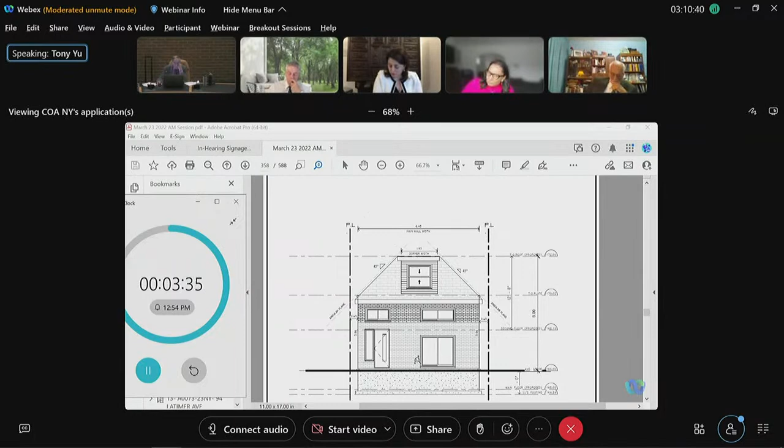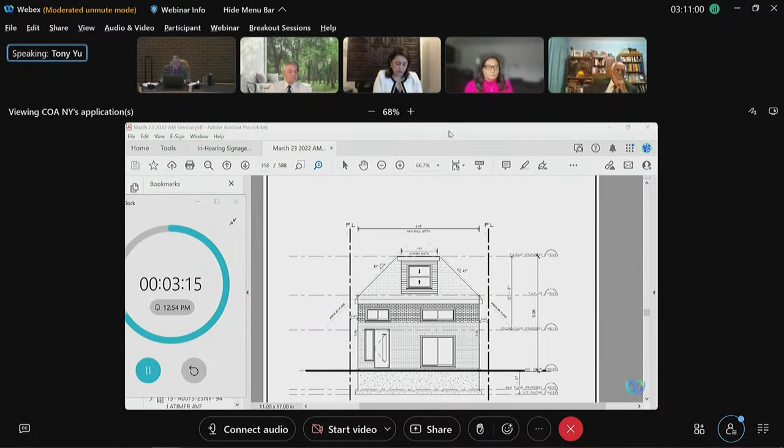If the 50% rear yard soft landscaping is really a matter, then the owner is willing to reduce the size of the existing basement walkup to be built, to achieve the 50% rear yard soft landscaping requirement. That's all the measures authorized by the owner to do, and I hope those countermeasures could address the adjacent neighbor's concerns.

Okay, now I have to admit I'm a little bit confused. You say if this is no good, the owner will change it. If it's the side 50%, he will change. Are you changing these variances? Yes or no? Yes, I will change. Hold a second—can you please tell me what variance you're changing and to what you are changing it? The staff has to record exactly what you're saying.

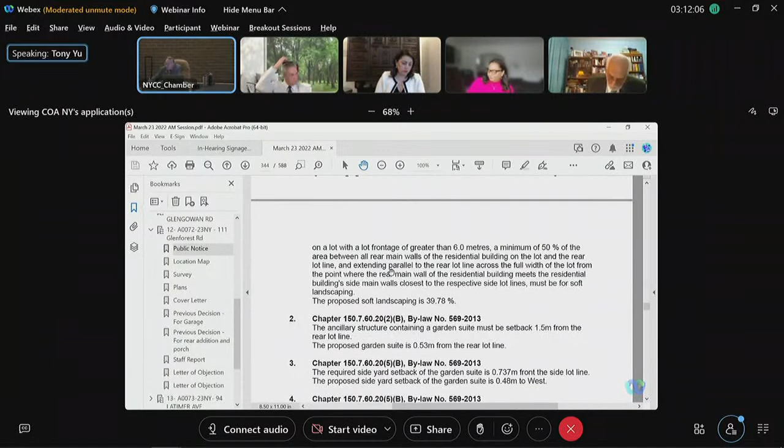Tell me which number you... Sorry, all the other variances still need to be granted relief. Okay, so the change you're making is removing variance number one.

Is that correct? Yeah, and I'm seeking to add some conditions, like a 3.5 meter fence on each side, on all sides, to guarantee the privacy of the neighbor. And the dormer window could change to a glass block window.

Is that affecting any variance here? No, no other variance. You just want to accommodate the neighbors by putting screening, is that correct? Yeah, that's correct. I believe that measure could address their concerns, like the privacy and the shadowing problem.

Okay members, questions. So far all I get from him is that he is removing variance number 1. Ms. Atarodi had her question, had her hand up first, please. To you, Mr. Chair, I have a concern regarding the minimum emergency access clearance for the garden suite, and therefore I would like to ask for clarification on variance number 3 and 4.

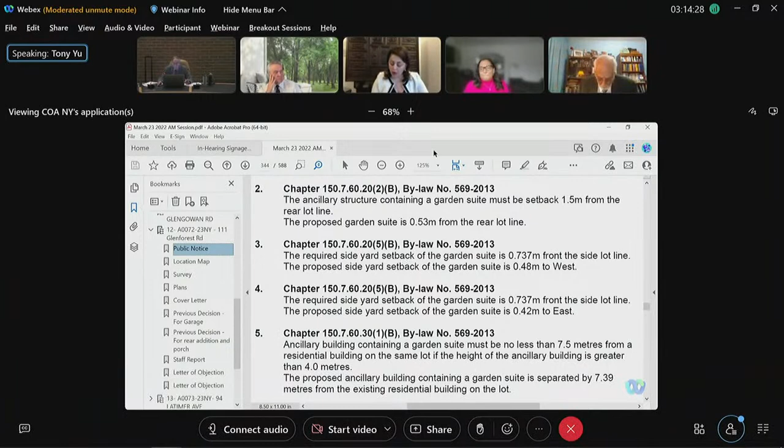It's an addition, meaning later you renovated and built another shed with this setback, correct? Exactly, yes. Okay, so now when I look at the site plan of the drawing, so on the west side...

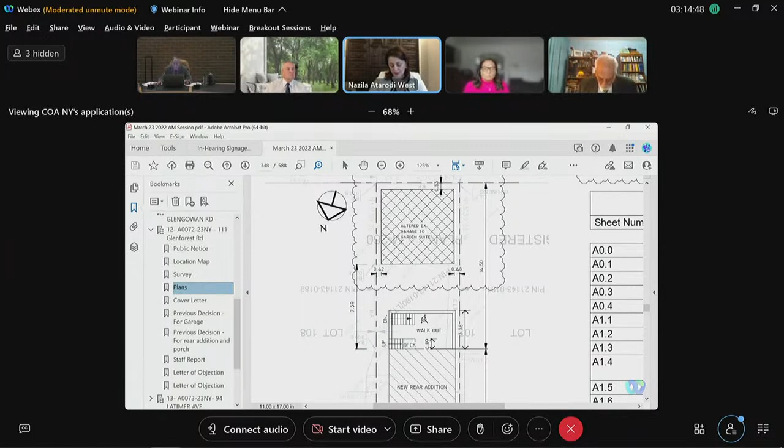...you just don't have enough side yard setback. How much is the side yard setback on the east side of the property? I'm just trying to see if we can have emergency access, at least on the west side. Well, on the west side of the garden suite it's 0.48 meter. I know, I'm asking about the actual dwelling, not the garage.

For the dwelling, there is an existing right of way. Well, if you look at the survey, the width of the existing right of way is about 2 meters, and the right of way ends at the adjoining neighbor's fence. Then the right of way will extend to the garden suite, and the width will reduce to 1 meter for the emergency access.

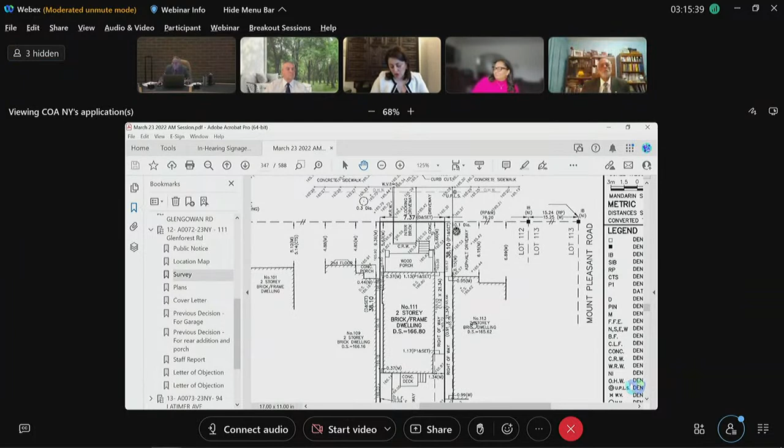So 2 meters from the east, so probably it's enough for emergency access. But your proposed garden suite on the west side is too close to the property, or is this the number you want to keep, or do you want to modify the number on the west side? I'm talking about variance number 3.

Variance number 3, the variance is requiring the setback on which side? West. West side. So there's no access to the emergency.

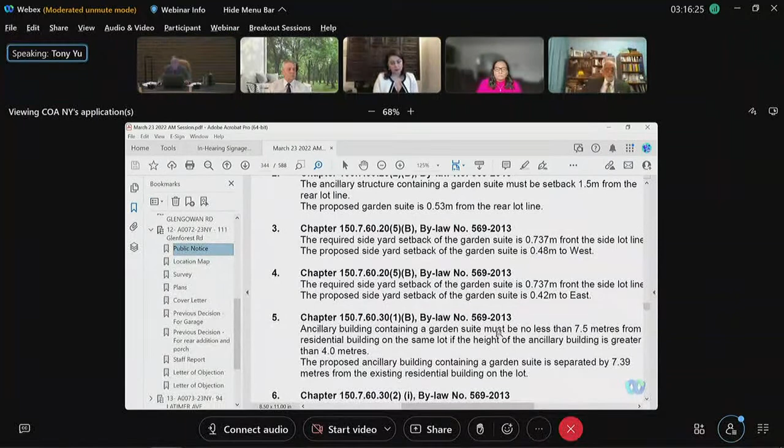The setback actually is the existing one, so we don't change any wall or move any wall. Just extend like 3 feet, 2 meters higher, to reach the 4 meters at the top of each side of the existing wall.

I'm not talking about the height, I'm talking about the side yard setback, not the height. Because the zoning bylaw allows an exception to the setback if there is an existing garage, and the wall could extend to 4 meters, as long as we keep the existing legal setback requirement. Yeah, you can go 4 meters, but you went 6 meters, 4 meters to the top of the second floor, and then with the roof it's 6 meters.

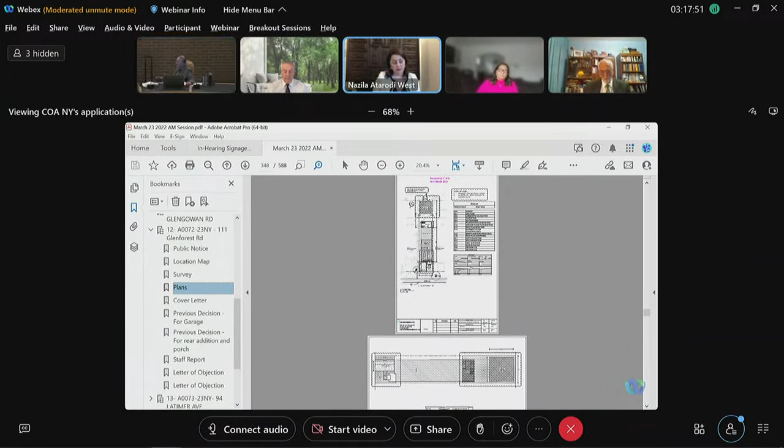That legally it should be... I know the staff have a condition to make sure we tie it to that. My question was something else. So another question: does your garden suite have access from the other side or not? The garden suite has only the main door access at the front.

Thank you. But there are 2 skylights, not dormers, at the rear side. Okay, thank you very much. Okay, any other question?

Mr. Hunt has a question. Mr. Chair, thank you. My question is an overarching one. Given the amount of opposition that we have heard today, was there any community consultation with the immediate neighbors prior to submission of the application?

No, no. Yeah sir, I know this is not required, however it would have been nice to reduce the anxiety. We always suggest to people to discuss it with the neighbors, and Mr. Hunt is right, but unfortunately it's not a requirement.

No, it was simply a question as to whether or not they had prior discussions. Yeah, and you're right, that would have been nicer and would reduce the anxieties. So anyways, if there are no more questions, I need a motion.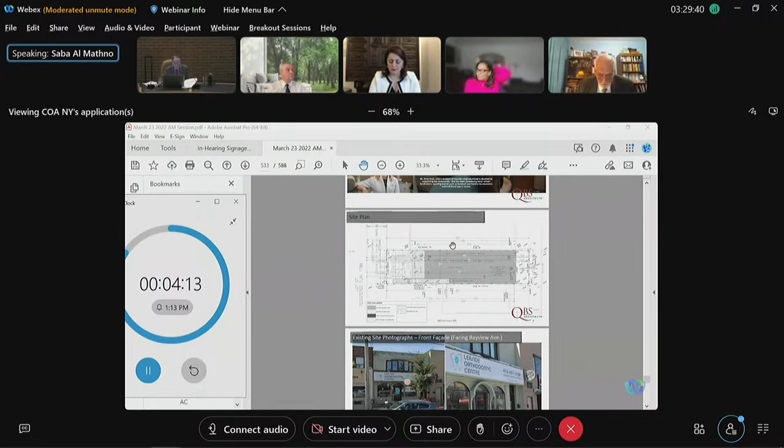The ground floor of the building will be maintained, as part of it is for the dental office. If you could scroll down a little bit - this is the situation, one more sheet please. Thank you. So this is the current situation. As you can see, it's a two-story building, one door dedicated to the dentist and a side door dedicated to the residential. This setting will be maintained.

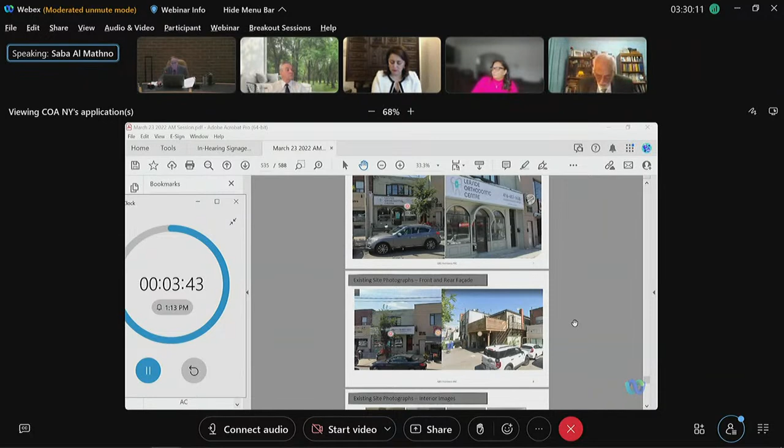And same thing, the situation at the back. So we will maintain the existing two parking spaces on the laneway, and we will maintain a fire escape to the back. We'll just be adding a third floor. If you please scroll down one more. So these are just some existing situations showing the access to the dental from inside and the access to the residential from the inside, showing pictures of the existing site photographs of the back.

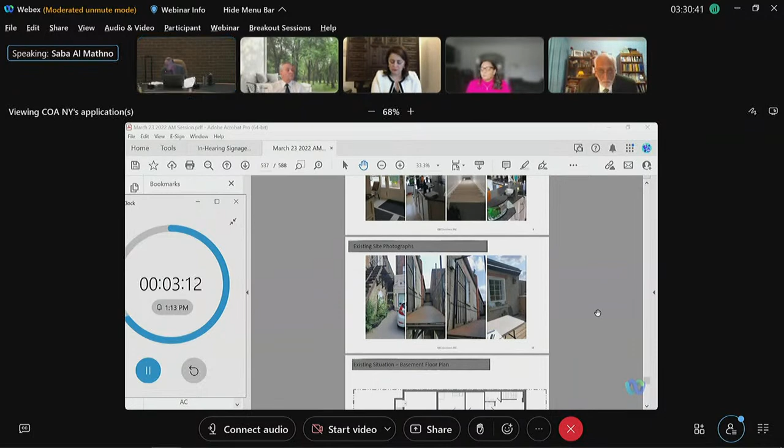Thank you so much. You could skip these couple next pages because they are just showing the existing building footprint. This is the proposed building from the front, and the next sheet talks about the proposed from the back. We don't have any angular planes, and when we did the design, we took inspiration from an amazing building that's recently been added to Bayview, which is a rental apartment, the Stack, that contributed positively to our street. If you scroll down, thank you.

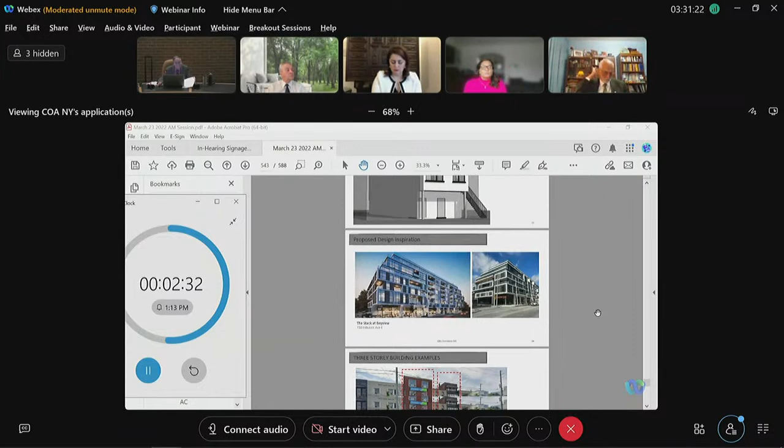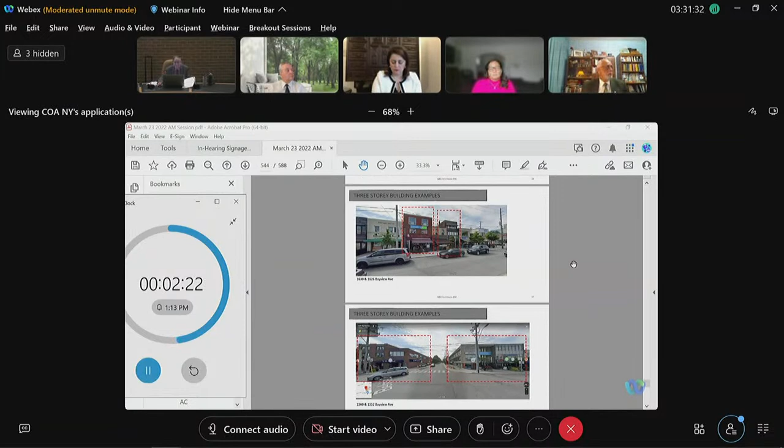So three-story buildings are evident on the same street, on the same block, as you can see - a couple examples, and most of them are mixed use, there are also all commercial. If we scroll - the basement will be for the medical use. If we scroll down please, this is the proposed ground floor, the proposed second floor.

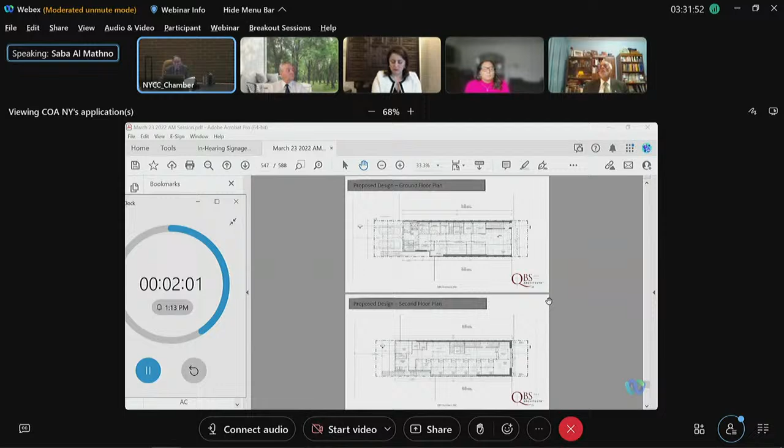So if you could zoom in onto the variances - variance number one speaks about the barrier-free parking, which unfortunately, due to the existing situation and width of the lot being 7.62 meters and having a fire escape on the side and structure, it's impossible to provide a barrier-free parking. As of this morning at 9:36, I had discussion with the manager, Mr. Nicolucci, and he agreed that it's impossible to provide a barrier-free parking.

In lieu of that, we maintained the two parking spaces. Originally both of them were dedicated to the dental use. After my discussion this morning with transportation, we agreed to dedicate one of them to the residential and one of them to the medical office, as they needed it for loading and unloading and bringing supplies from the back, so they won't interrupt the daily operations. Noted that only the ground floor is barrier free - the other two floors are not, because it's an existing situation for the residential.

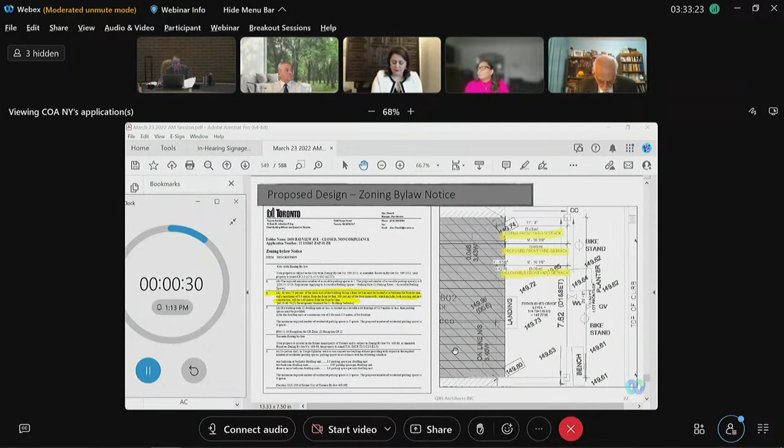Moving to variance number 6, which is basically our second variance - sorry, like the first sheet, we can keep that because it's an existing situation. The distance of the main wall from Bayview, we are maintaining that, which is the minimum allowable is 3 meters. We have 3.4. And the other variances are speaking to the parking.

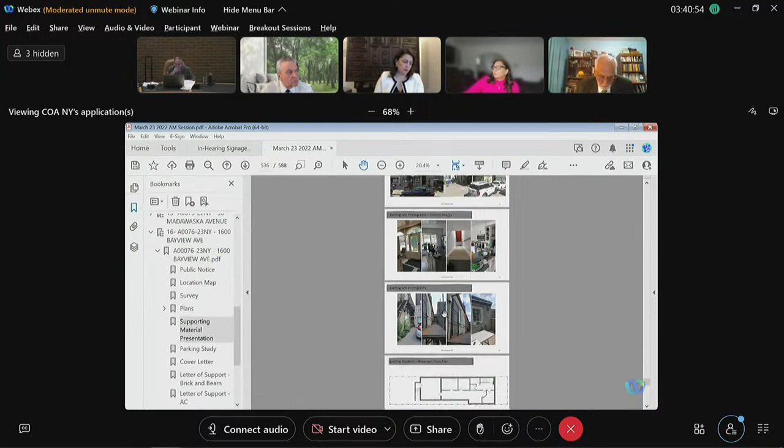I live in the neighborhood, so I hear the neighbors are concerned. But if you look at our proposal, we don't have any height variances, we don't have any angular plane variances. Right now, we are deficient only 1 parking spot and a barrier-free space.

So what we did, thank you so much. If you could zoom in on the page right after. Originally we had these 2 spots maintained, existing to remain, and they were both for the use of the dental office. Now one of the units, the residential unit, will have a parking spot, and one will be dedicated for the dental. This will reduce even our variance - the allowable is 2, we are providing 1, so we will be asking only for 1 spot.

Also, we have provided a parking study done by a professional consultant proving that there is enough parking in the neighborhood for the purpose of the dental office.

In terms of privacy, for the 3rd floor, we could definitely provide screening. Although this is not a variance, we would like to enhance the privacy of both the 3rd floor units and the neighbors. As I mentioned, there is no height variance, there is no overlook, there is no GFA variance.

And we worked closely with planning. We've been working for about a year with the planning department, and they have no objection. Actually, they are in support of our application.

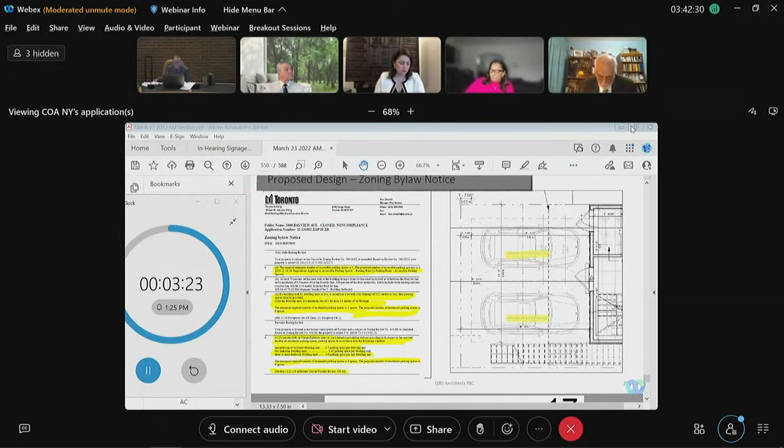Okay, can you please expand on the transportation comments? They said it's okay, the spaces from 2 to 1, provided it complies with variances 7, 8. You have only 5 variances. Could you go over that report with us?

The transportation comment - I don't know if you are able to put it up. Well, from what you remember, what you discussed with transportation this morning? Yes, exactly what I got from Luigi.

It said: we acknowledge that the site width of 7.62 does not allow for provision of 2 side-by-side parking spaces, with one of them being an accessible parking space. As such, transportation services is comfortable with the provision of 2 standard parking spaces for the project as shown in the attached architectural drawing. I don't think this will create other variances, but it will be determined by the committee staff in consultation with Toronto Building. This was as of 9:30 this morning, and Simon was copied on this.

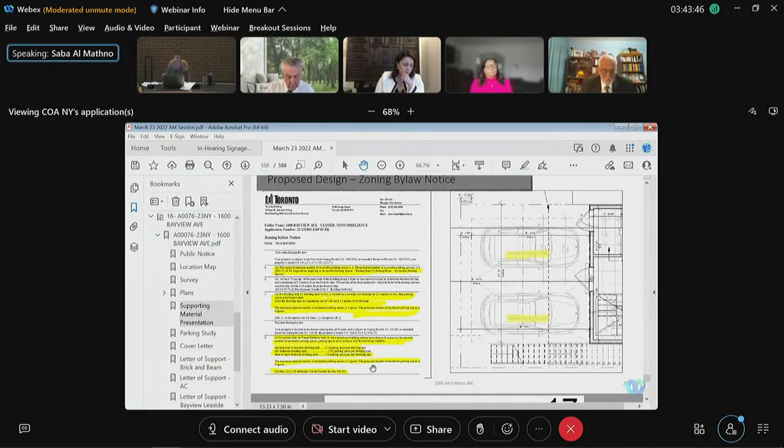Okay, thank you. Members, any questions? Mr. Khan? Thank you, Mr. Chair. Through you, sir, I want to ask the architect representing the 5 variances here.

Madam, did you happen to see - I mean, you mentioned you spoke to the manager of transportation services this morning - but did you see the transportation letter of March 20, 2022? Exactly, this is based on that, because this letter also, like my other colleagues received, came very late. So finally I was able to speak with the manager of transportation this morning, 9:30 a.m., and we came up with this solution together.

My question, madam, through the chair: the letter suggests amending the site plan. Are you prepared to amend the site plan? Yes, I have, and I have sent him a copy. We just labeled one parking dedicated to the dental, one parking dedicated to the residential, and he deemed it acceptable.

But has that plan been seen by the planning staff? Mr. Simon Lam was copied on my correspondence this morning with them. It's exactly the same, just the labeling - one for the dental, one for residential, and that's it. The exact same size, exact everything. Yeah, we don't have that information, madam.